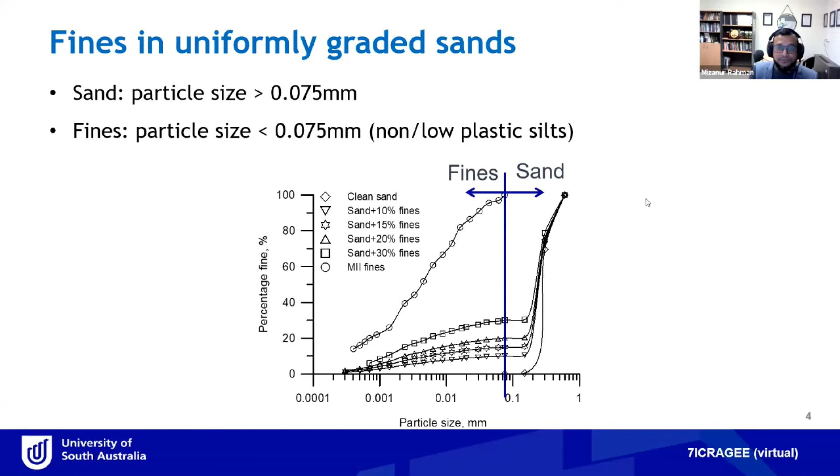Now, what is the problem with that? If we have a sand with 10% fines and we treat it as a single soil, we do not have any problem. We'll do the test, we'll understand the soil behavior, and we can implement this understanding in our design. But in reality, a single soil may be mixed with different percentages of fines. Then the single framework doesn't work.

If we had a consistent trend of decreasing, we could add a reduction factor to the clean sand and use it in design. But that's not the case here. So the comparison basis, whether we're using relative density or void ratio, is not consistent. So for this particular type of soil, I'd like to start with the basic concepts.

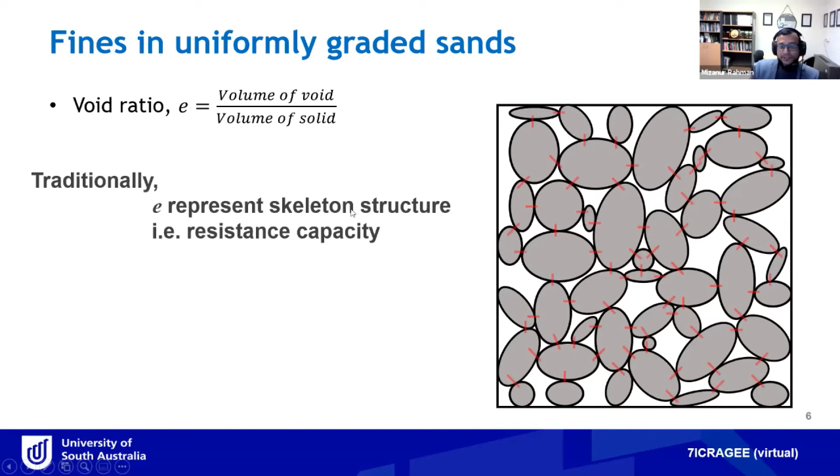For this void ratio, we have particle contact points. When you apply load to this soil, the load is transferred through the contact points. So what does it mean? This void ratio represents the skeleton structure of the soil, that is, its resistance capacity.

But in this soil, if I somehow manipulate these and add some fine content in between the voids, these fine content are not contributing to the skeleton structure. They are not taking any force. But what they are doing, they're increasing the solid content in the void ratio calculation, decreasing the volume of void in the calculation. So their void ratio is decreasing.

So what we would expect, the void ratio of clean sand would be higher than void ratio of sand with fines, but the same skeleton structure. But they might have the same resistance, because if we applied in the soil some load, then they would be transferred through the same skeleton structure. So these are the inconsistencies we're observing.

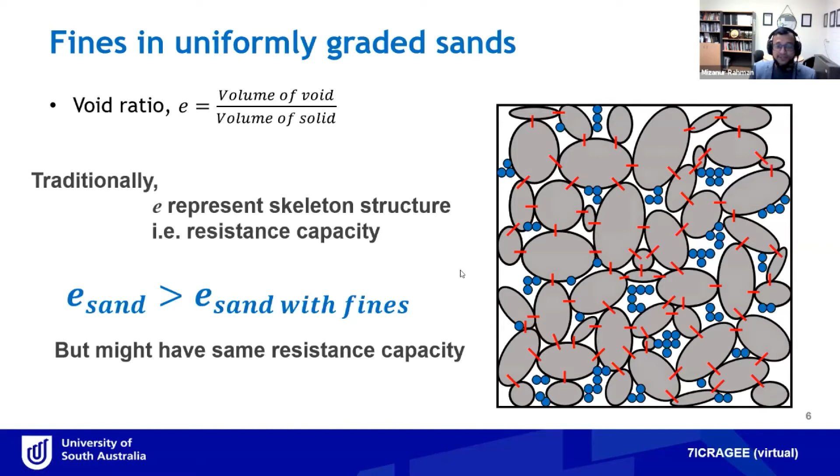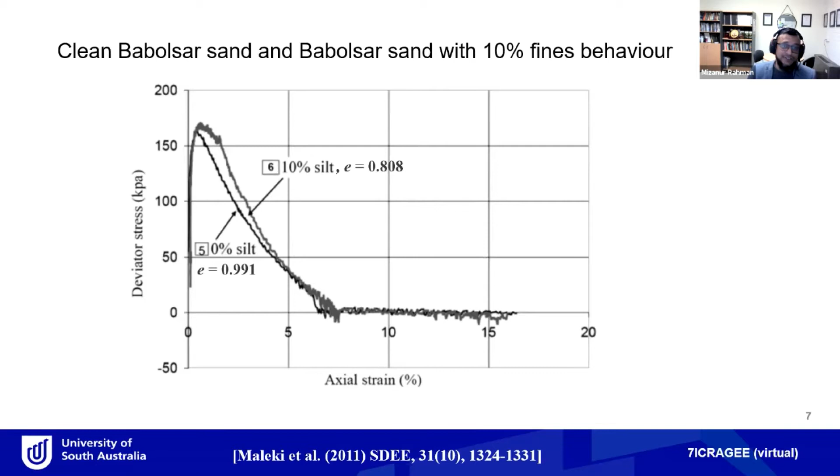And ideally, if we look at the same soil, then lower void ratio means stronger skeleton structure, more density of contact, higher strength. This is not what we see over here. So void ratio is not consistent. Let's see another example over here. This is from Kuerbis, who first used the equivalent void ratio concept. That's why I picked this figure over here.

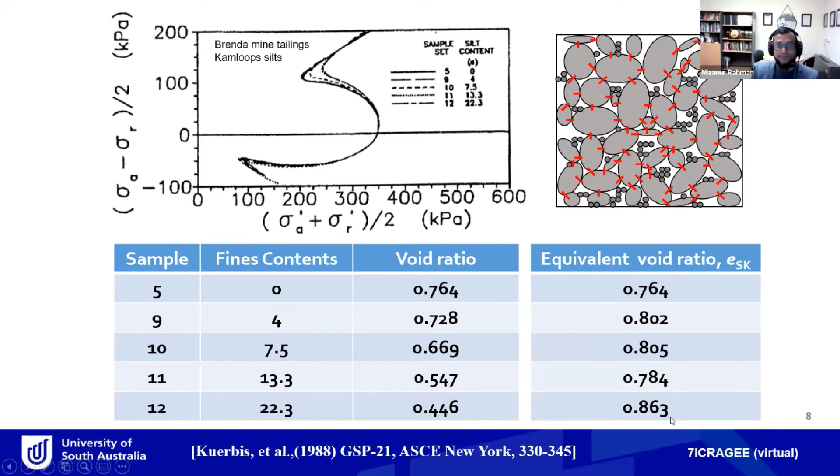So what they have done, for the first time, they're considering these fine particles over here as void. Based on that, they're calculating a skeleton void ratio equivalent to clean sand void ratio. When you do that, then we can see the void ratio become consistent, except with too high fine content. Okay, let's move further, see what happened.

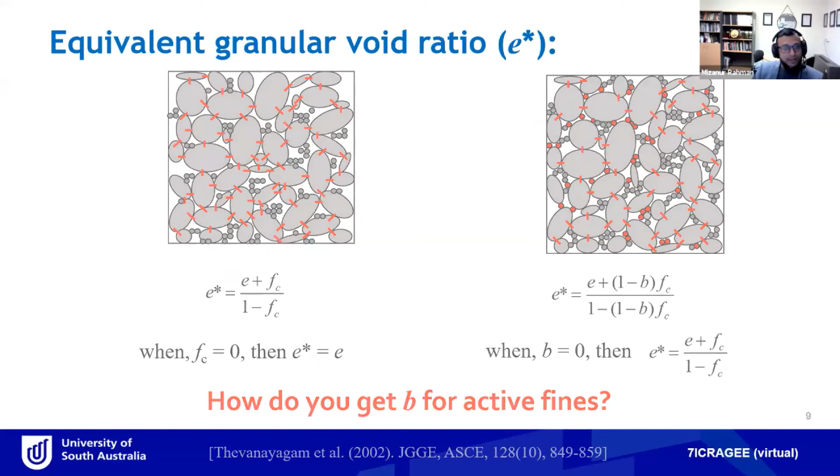So when Thevanayagam first presented this e* equation with B, he assumed about 1/4 of fines would be active. So B equal to 0.25, and it's constant. It doesn't vary with fines content. But later, they published another paper as a reply. They said that B for different sands with fines varies with the uniformity coefficient of sand with fines and diameter ratio.

In 2004, Ni proposed that actually this b depends on the particle size. D10 is the 10% finer size of clean sand, and small d50 is the 50% finer size for the fines. In 2008, during my PhD, I realized it must be related to particle size and also the fine content. If fines fit in the gap between the coarse particles, then if the fine content is significant enough, they must come in between the coarse.

So based on that, with some growth theory, we came up with a semi-empirical equation like this. In this equation, we had two fitting parameters, M and N. And then in a later paper we published for 9 different data sets, we could just assume N equal to 1 and M equal to 0.3, and that satisfied a wide range of data.

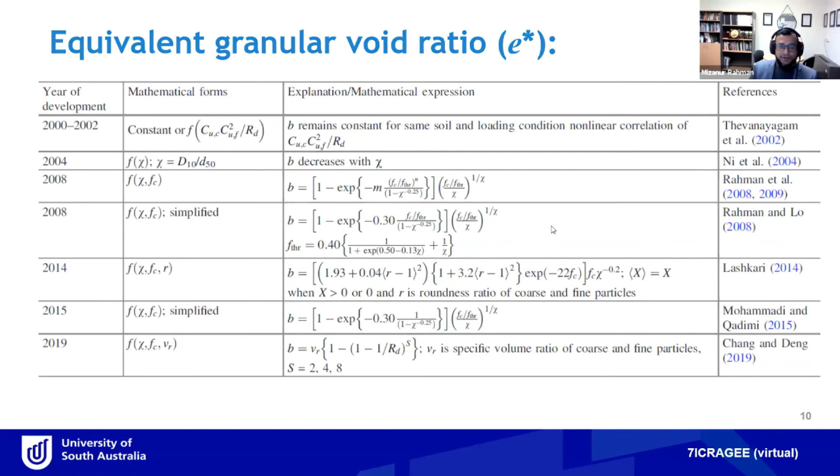Now, whatever equation for b we use from here, it's not the important thing. The important thing is, if we get an appropriate e*, equivalent granular void ratio, whether we can further go ahead with some theory development. I have used lots of data from literature, mostly using the equation here, for example some listed in the paper, for different types of behavior. We use that equation and it works.

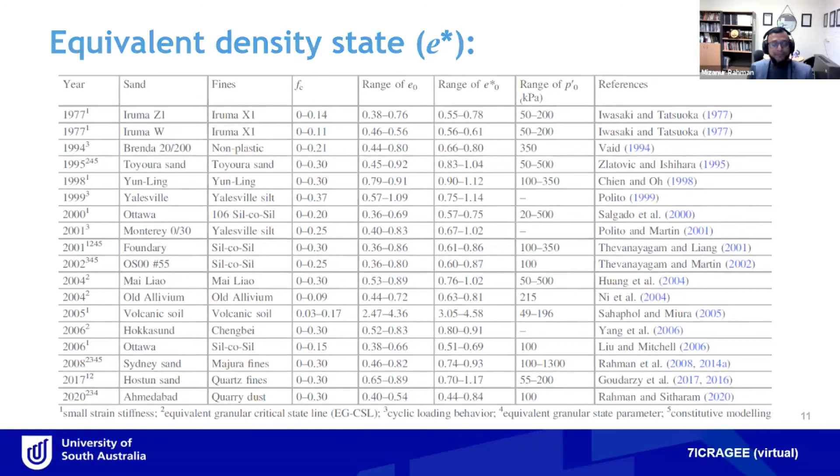Now, when we look at b and how b would vary with particle size and fine content, back in 2005 or 2006 or 2007, one particular paper helped a lot. That's McGeary in 1961 from the Journal of the American Ceramic Society. They have big particles mixed with smaller particles. As you see, as you increase the fine particles, the bigger particles disappear in it. That developed the understanding and the mathematical formulation.

But now with my student, we do 3D DEM simulation. Here we have 0% fines, that's clean sand, about 10,500 particles. This one, 5% fines, about 66,000 particles. And then we have 10% fines, about 130,000 particles. So as you see, as we increase the percentage of fine content, the problem becomes very, very difficult to run within a reasonable time in computer simulation.

But when we do the test, we see at critical state this clean sand develops a soil skeleton structure, a force structure like that, a high density structure. With that, you can assume this soil would take higher strength. When you have 5%, despite 66,000 particles, the skeleton structure is far less dense. From that, we expect lower strength, and 10% is even less. So it tells us when a natural soil has fine content, it has a natural tendency of getting lower strength. So the liquefaction problem is worse for sand with fines.

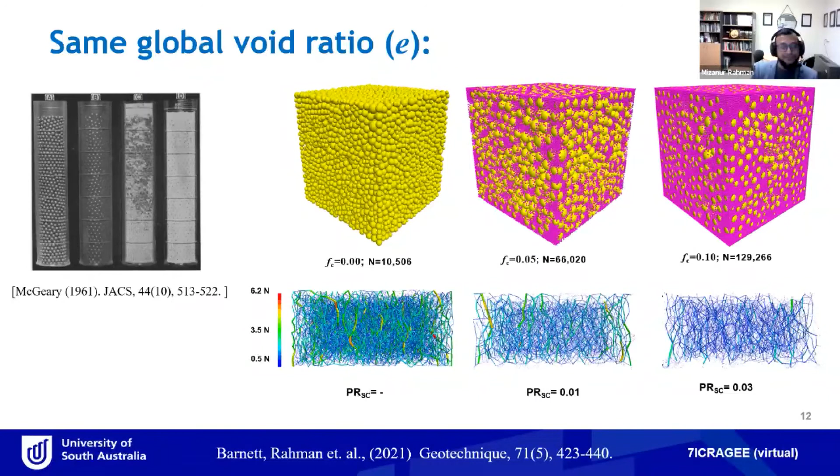Now here we can see clean sand has a higher critical state line, sand with 5% fines is over there, and 10% fines would be over there. And this is the q-p path, this is the M line, the critical state at the end of the test. So it tells us even for the same void ratio of the soil, sand with fines would have lower strength.

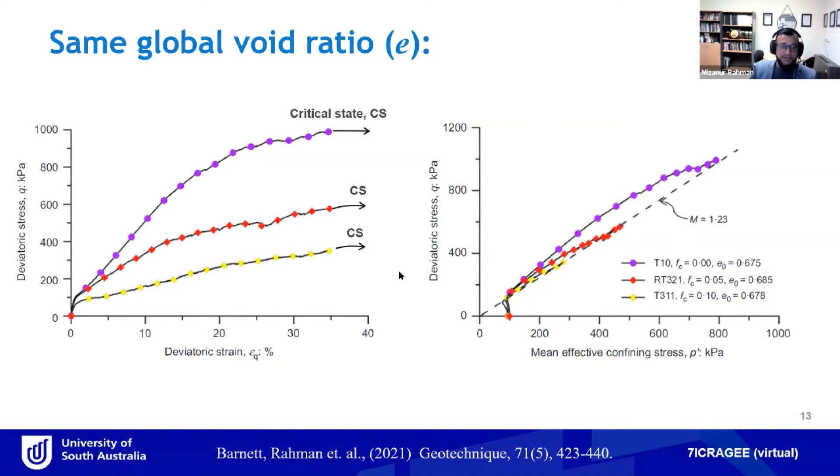Let's see a few applications. First, I will look at the critical state side. These are the sand test data, Sydney sand with nonplastic fines. This is the critical state line for clean sand. By the way, the y-axis is void ratio, and the x-axis is the mean effective stress at critical state. This is 5%, 15%, 20%, and 30%. As we increase fine content, as we expect, the critical state line goes down.

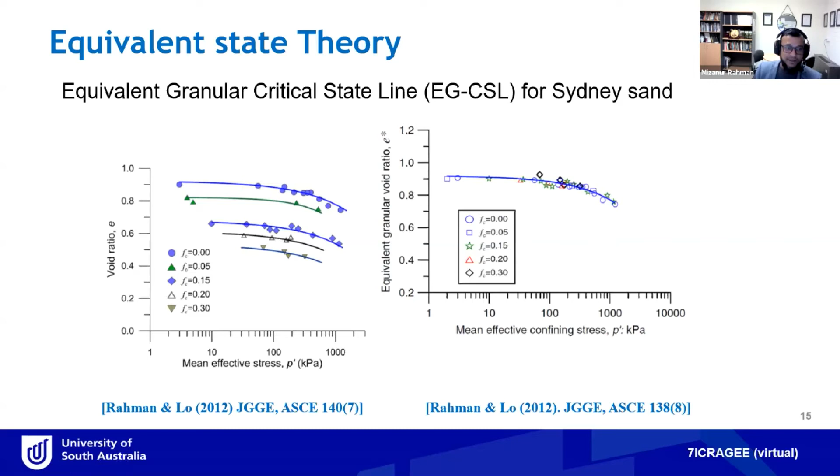Each of these fines and critical state frameworks is good enough to do further analysis, but in this case, as you see, it's not possible because you have to do tests for all these different fines contents and develop the framework and do the analysis. And then if you have a soil of 10% fines, you do not have the data.

So what we have done over here, this y-axis void ratio, we transform to equivalent granular void ratio. So everything merged with the clean sand data. So the clean sand critical state line is basically the critical state line in equivalent space for sand with fines.

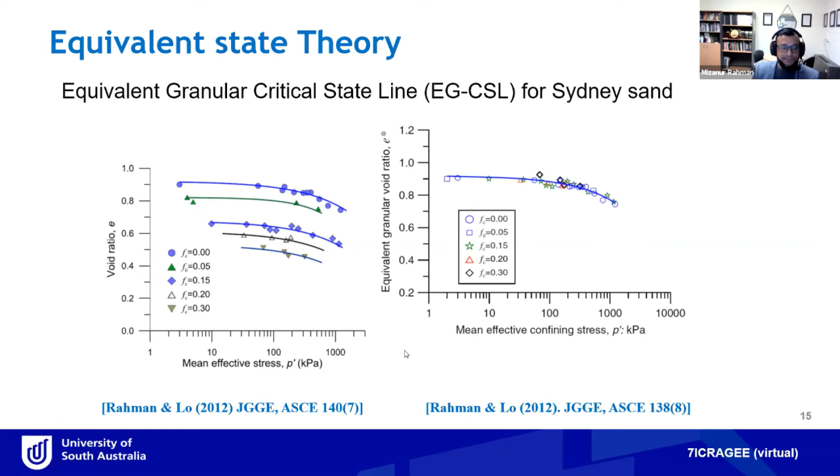When you have the critical state line, we can use the Been and Jefferies concept to define a state parameter. A state parameter is nothing but the void ratio of a soil minus the void ratio on the critical state line at the same p. That means a state parameter combines the effect of density e and p. Now, if a soil is above the critical state line, that means the state parameter is positive, it would be contractive and liquefiable. If a soil state is below the critical state line, it would be dilative and non-liquefiable.

But when we have fines content, then we have many lines and we merge them into the equivalent critical state line. From that concept, we can have an equivalent state parameter in the same way. That will combine the effect of e, p and fines content.

Now let's see one example use of this theory. We use Ahmedabad sand to assess liquefaction. This is clean sand data. This is quarry dust and different percentages of fines content grain size distribution. These data come from Dash and his other works with Professor Sitharam. But when I use this data in equivalent space, this is the critical state line we get for sand with different fines content.

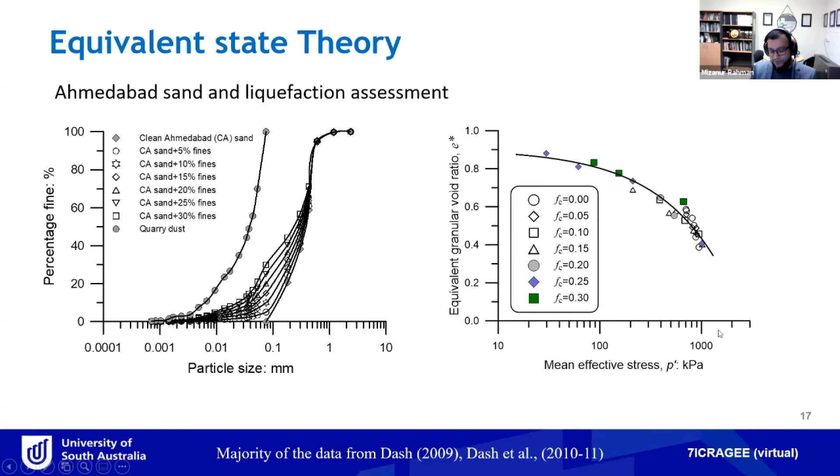Now, for critical state analysis, we need to estimate what would be the cyclic stress ratio we would expect from an earthquake, which we can do from the simplified method from Seed and Idriss. But in an experimental setting, we do a triaxial cyclic loading test where sigma d is the magnitude of deviatoric stress and sigma prime is the confining stress.

As we have a higher cyclic stress ratio, this magnitude would be higher and the number of cycles to liquefy would be lower. So in this graph, the y-axis is cyclic stress ratio against number of cycles. So the number of cycles required for liquefaction would be lower for higher cyclic stress ratio, and for lower cyclic stress ratio, the number of cycles would be higher. So we get a line.

But if we change the void ratio, if we change the confining stress, it would be different lines, but the same trend. In this figure, we have additional complexity. We have fines content. For each fines content, same global void ratio, different lines. So this is a problem.

So what we do over here, we try to estimate what would be the cyclic resistance ratio for an equivalent 20 cycles of loading. That depends on the magnitude of the earthquake and fault characteristics. So 20 cycles and the respective cyclic resistance ratio is the cyclic resistance ratio at 20 cycles. If we get all the data and plot them in this figure, this is cyclic resistance ratio and this is equivalent state parameter, they come to a nice trend irrespective of different fines content.

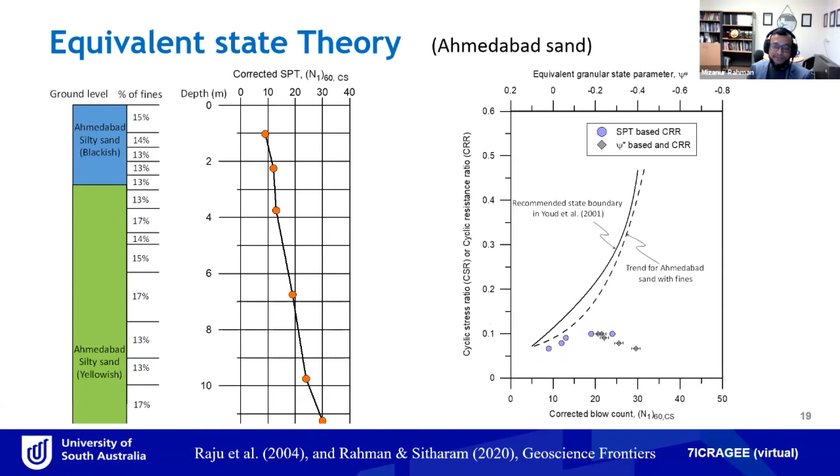To develop the constitutive model, we need at least four different strategies. One is elastic parameters, yield surface. If it is a model for critical state, then critical state parameter, dilatancy or flow rule, or hardening rule, or plastic modulus. So let's look at the elastic parameter. How do you handle that?

This is the Hardin equation to estimate the elastic parameter G max. This is the equation. What we did over here: we just replace e by e star for different fines content. This is the measured data, and this is the predicted data using the clean sand equation, replacing e by e star. It matched very well. One thing you would notice, clean Hostun sand had higher G max than Hostun sand with 30% fines content over here. But despite that, it predicts well. There is another data set we analyzed and it did the same.

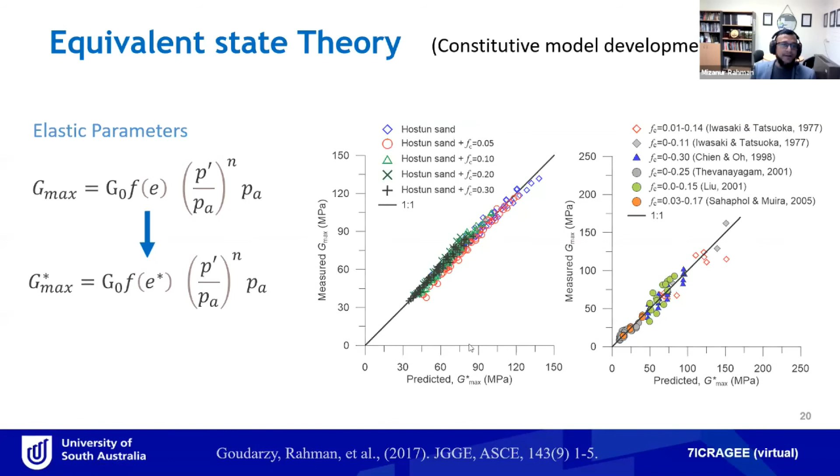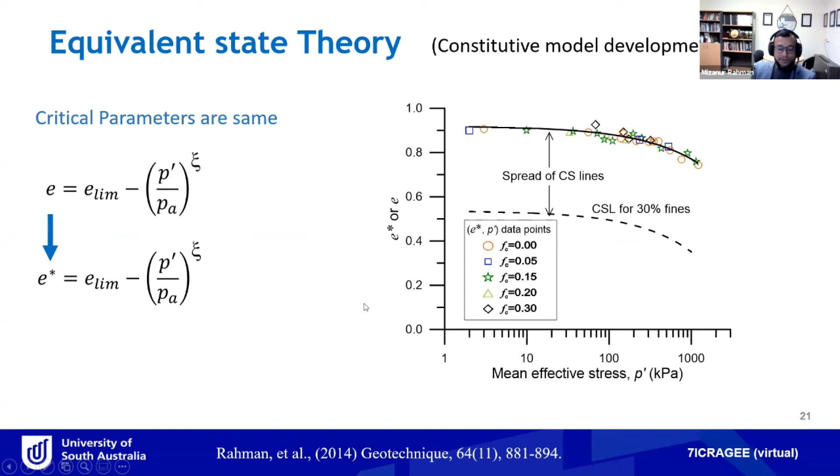For the critical state parameter, because all the critical state lines merge with the critical state line of clean sand, the parameter doesn't change, it remains the same. So we just use the parameter for the clean sand critical state line. When you look at the dilatancy parameter, it's the bounding surface model we are looking at. So it has a function of psi, all the parameters, this D, and the stress ratio over here is missing. All the parameters D naught and M would be the same, only we change psi to psi star, as I explained before. The plastic modulus and hardening parameter would be the same. Every parameter remains the same. We just change psi to psi star, G to G star. And the model is ready.

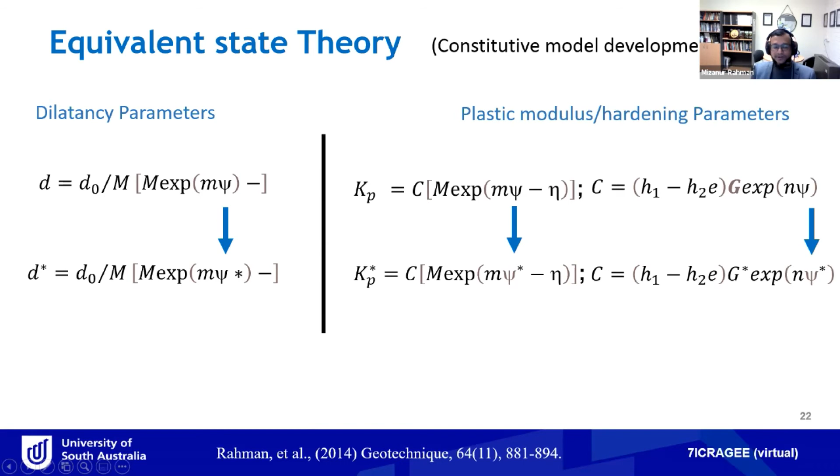I put two models over here. The model I explained is the first one, and the second, the blue line, was another model with fabric evolution. At the beginning, I said, forget about the fabric, just focus on the void ratio. And we know that is not correct. So I avoided the complexity, but actually we can consider the fabric. In this figure, both of them do quite well. So why do you need fabric? If you look at the dense soil behavior, 0 and 15%, these are the paths. Without fabric, this is the dotted line prediction. The dotted line is much more contractive. It doesn't capture the behavior, but with fabric, it's much closer. So fabric is needed to some extent.

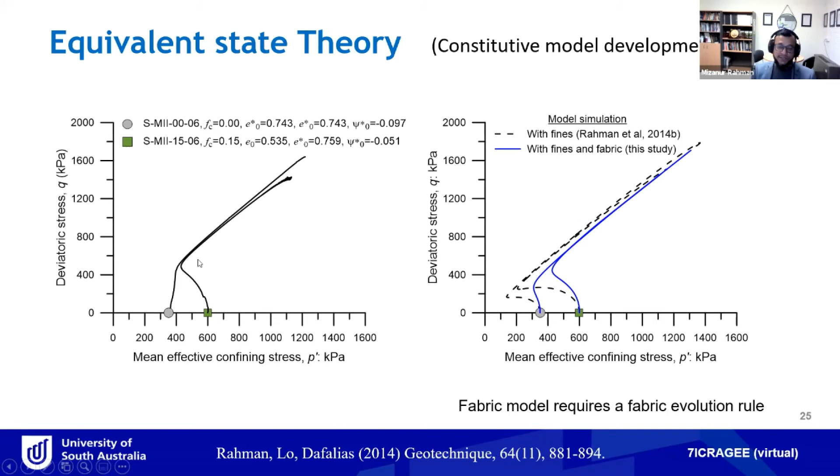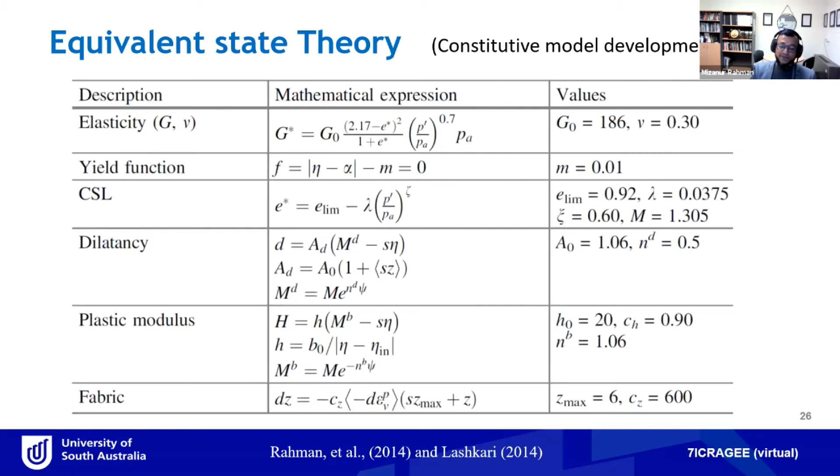If we want to know cyclic loading behavior, we again choose one of the Dafalias models from 2014. This is exactly the same formulation. There are little tricks. They change the yield function slightly so that they can play with cyclic behavior, and they also have a constant fabric parameter. This fabric is different from the fabric evolution. We checked the behavior, just one data. I didn't present the real prediction, just a hypothetical curve over here.

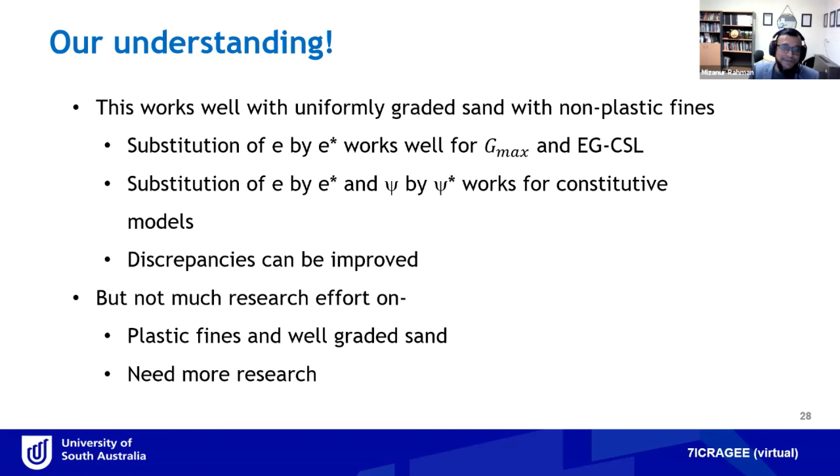Thank you. Any questions? Professor Rahman, this is the first time I had the concept of equivalent void ratio, how it affects, and you have very nicely explained step by step, where initially the fine particles are filling up only the voids, then later they are in between the sand particles, how they affect it and how to take care of it. I mean, first time I'm hearing that sort of concept. More than that, you have very nicely explained the implications of that. It's a very nice presentation.